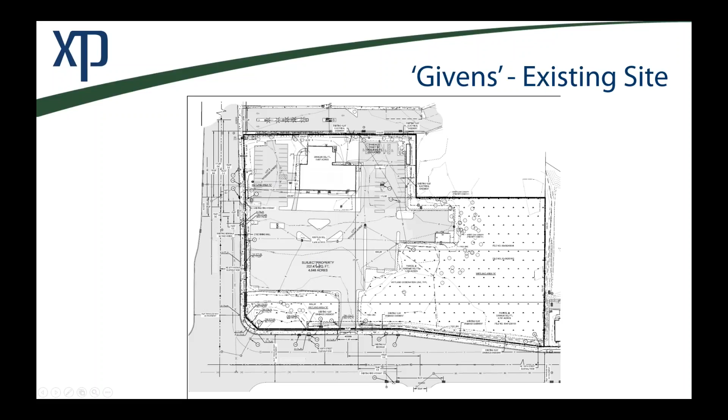I always like to show the givens, right? People, if you're kind of new from college, you're always kind of handed the givens to start a project. Well, this would be the given in this case. So we have the existing site, and that's kind of the starting point. The store is going to go in the southern portion of the site. There's already a store in the northern zone. That's going to stay there. So it's the southern portion where we want to build a new store. And that's it. This is the info we start with.

And we need to, specifically on the stormwater side, create this. All right, this is where the store is going to go. Here is the parking and the sewer and all the elevations, all the detail to build it. Well, the detail to build it and, of course, to review that that makes sense. That's what the city will do.

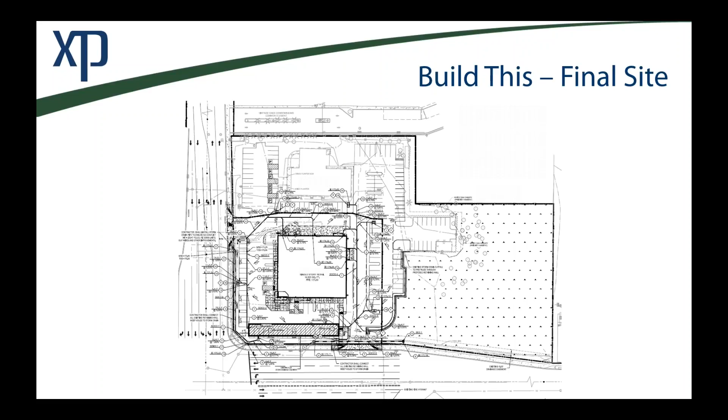So for this project, we looked at design constraints. Well, the first is there's a first flush requirement. Okay, so we need to hold on to, retain, and infiltrate the water quality event on site. In this case, first inch of rainfall runoff. So we have the first flush we need to hold on to, and then there's no increase in the flow for the 2 through 100 year rainfall events. That's pretty common. In this case, we aren't looking at volume, it's just peak flow.

A lot of cases, a volume also can't be increased, right? So the existing site, what's the peak flow and what's the peak runoff volume? Many cases you need to mitigate your developed condition flows and the volumes to not exceed the existing.

So looking at a development project, beyond just stormwater items, there's a large minimum parking requirement, as you would expect. A store's going to have lots of customers, so that means a lot of paved area. So the site's going to be highly impervious. And something else, high traffic or heavy truck driving routes. So there's an idea, we'll talk about pervious pavement. Whether or not this is really a concern in this area, it was thought that loading zones and areas where a heavy truck will turn its wheels a lot might really erode a pervious solution. Okay, so that needs to be taken into account.

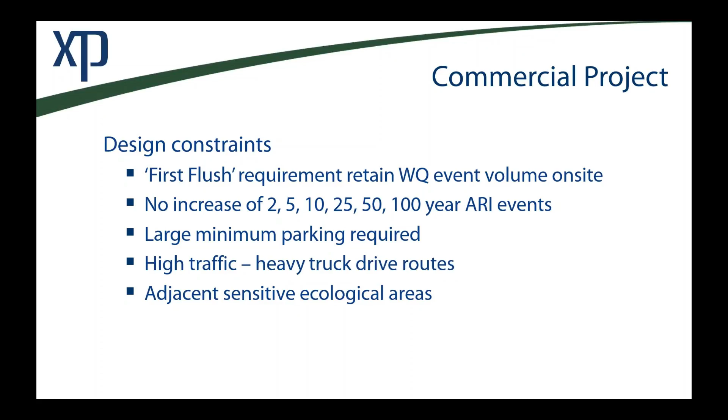All right, so considerations on the site. We'll look at this more in a second, but if you can remember from the pictures, there's really no room for a single conventional detention basin, right? We would have to have too little parking, or it wouldn't work on our site. So we have to get more creative. There's multiple drainage paths. We'll see how the roof drains, the different parking zones. Those all kind of create problems for us when they come together.

Ultimately, there's an existing storm system that we're going to connect into, right? That's pretty common. So that's, of course, a constraint, a consideration. We need to make sure we can match into that system. And for the pervious solution, there was maybe a thought of, well, what if this was clogged? Okay, so we could look at kind of a clogged scenario of the permeable pavement.

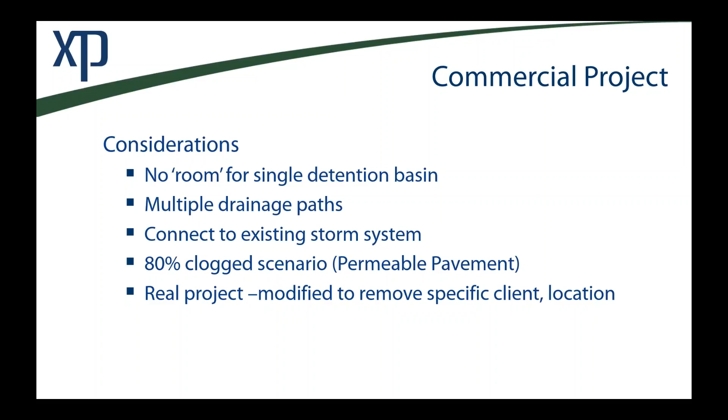And just to reiterate, this is a real project that actually incorporated the final design that I'll show. Though I have removed the street names, removed some stuff to make it more generic. And also, I am showing all the design considerations, right? Often you might only show on plans the final one. Well, here I'll be using XPDRAINAGE as the tool. We can look at these all side by side, so you can see the thought process across this project.

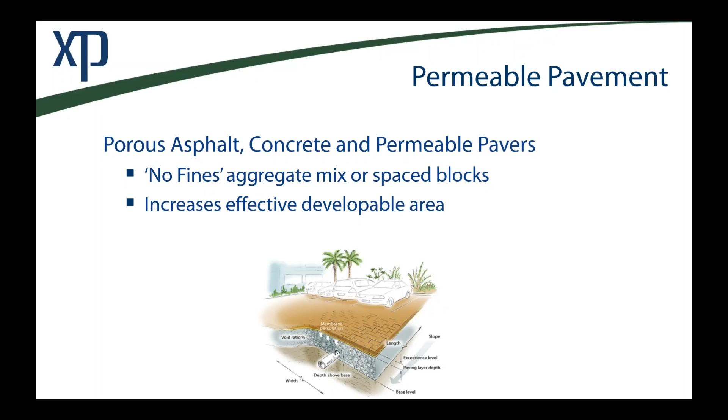For a bit of background on the different options, permeable pavement. That's porous asphalt, concrete, or pavers. Basically, that's a no fines aggregate mix or spaced blocks. Think of it like that. So because we're able to have water immediately get down through this, as you can see in that cross section below, we can increase the effective developable area quite greatly. So whereas we might have to have a pond or a swale or some series of pipes, we can just have this porous area that you can park on top of. So it's pretty fantastic for that.

And it's also a really great tool to infiltrate that runoff volume, that initial first flush volume. And in doing so, we're going to really be able to reduce the amount of pollutants that are going to be on our site. A big one is temperature. I'm physically in Portland, Oregon, so cold water fisheries.

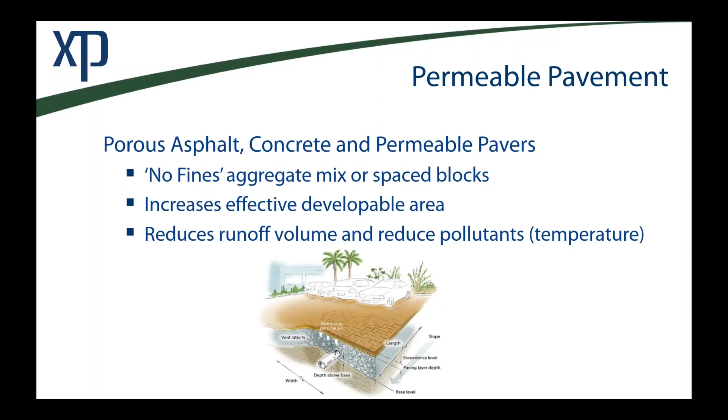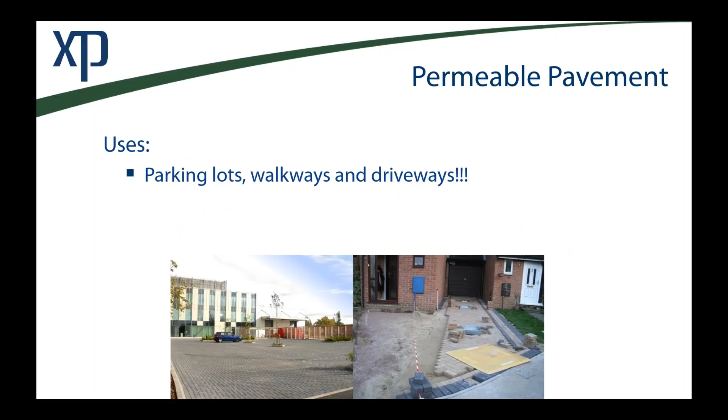We want to knock down the temperature of the stormwater running off our site as much as possible before it runs into the streams. Okay. Uses might be straightforward. If you're not familiar with this, it looks like fewer people have used this option. Pervious pavement can be used pretty much everywhere: parking lots, walkways, and driveways. That's how it's used on this project.

So there's a lot of discussion about how fantastic this is for main arterials and highways, right? It has really the same life cycle that a normal asphalt roadway would have, but it's a great reducer of spray and increases visibility. So one thing to watch out for is perhaps freeze-thaw cycles, but lots of discussion about how that isn't really a disturbance as much as sediment loads in these systems.

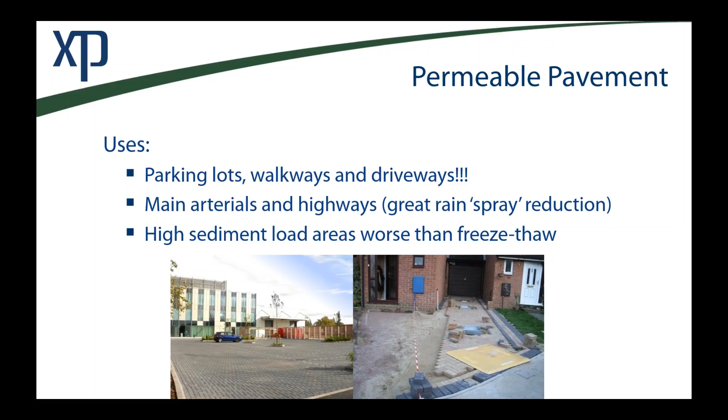So considerations for permeable pavement. We really need to consider a few things, which are, practically speaking, in most cases very hard to do, really cumbersome. But that's one thing that XPDRAINAGE does really well. So we actually need to assess the hydraulic behavior through this facility. Among those items, what about site slopes? We need to look at how the flow actually goes through the filter zones, how it will move down along that pervious area, and what if the site has some sort of slope along the parking area?

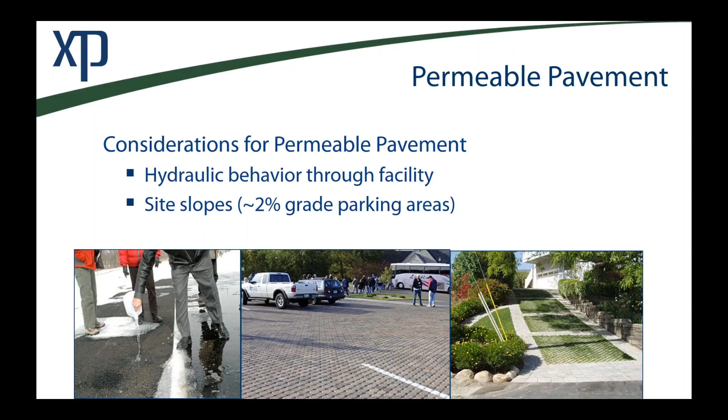You could have a perfectly flat parking zone, because the infiltration will occur directly in the parking area with the permeable pavement, but you might have to tie in. You might need to meet a couple areas that are at different elevations. So whether you want to or not, you might have to put it at a slope. Well, you might have water bubble up out of one end. So we'll look at how slope along these facilities is often overlooked, and see how big an impact that could make. As I mentioned, the true layering of structural fill.

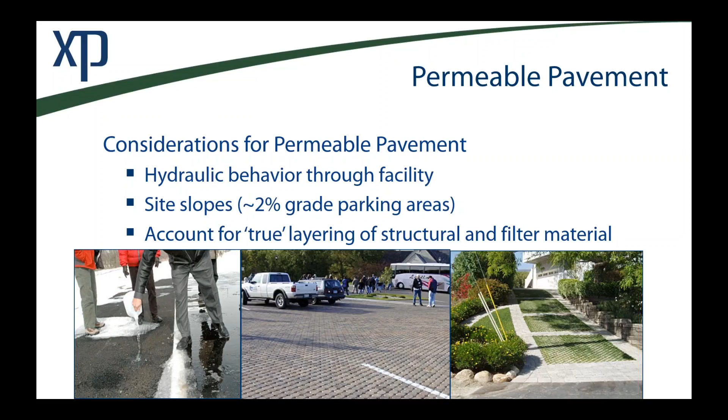Another item in the general hydraulic behavior is there's likely many different outlets to a parking area like this. You're probably going to have underdrains, maybe not. If it floods in a high flow event, you're going to have curb cuts, so you're going to have weirs all around that parking area. To represent all of that in Excel, which I had done in the past, or some basic tool, is really hard. So we'll see how easy this is to incorporate and check out, even in just a few minutes in XPDRAINAGE.

The other item is a storage tank underground. This could be an above ground rainwater tank, but we're looking at below ground collection tanks. These systems vary greatly. They're manufactured in different media by different groups: corrugated, plastic, steel, precast concrete, milk crates, as I'd call it. So that's the general concept. As you can imagine, there's so many different things you could do. Having flexibility in how you can assess that is really important.

The main idea of why this is so advantageous, and it looks like over a third of the people tuning in have used this before, is that this lets you basically have that detention pond idea, but underneath parking. So right away, a really big win. It might be the make or break aspect of a site. You might need to have 30 extra parking spaces, and that lets you have a certain store, or add in an add-on commercial retail spot on your site.

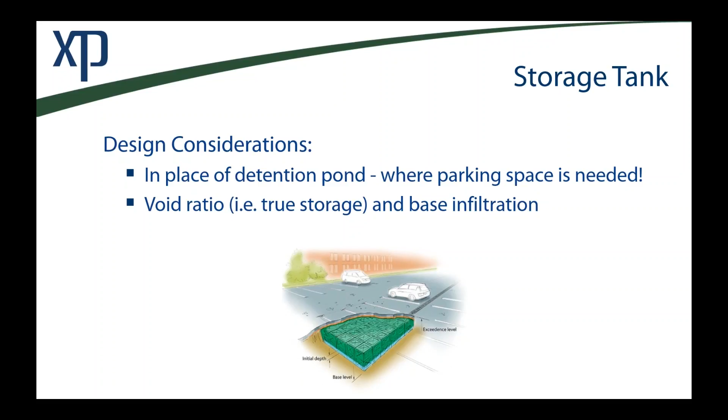So big ones to look at: void ratio, what's the true storage, and all the types of infiltration you can get around this. You probably have some sort of base infiltration under your facility, and infiltration on the sides of the facility. Being able to assess all of those pieces is something we're going to do in XPDRAINAGE, and see how this ties into the whole drainage system, not just using a spreadsheet or one tool to look at just the basin, but seeing how it incorporates itself into the rest of the system and its impacts is really important.

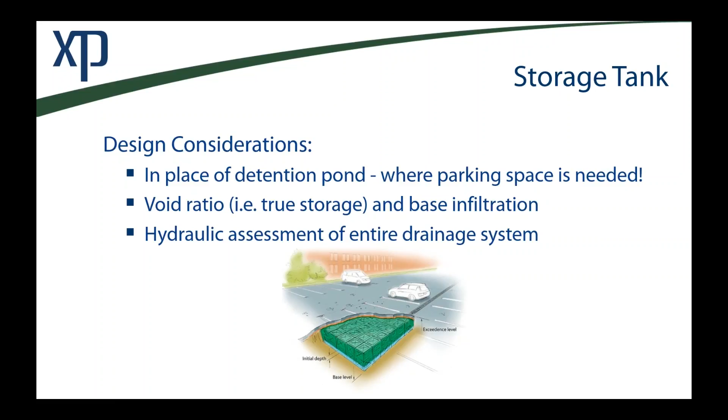So let's just jump right into this project that I can show. So here it is.

So here's a real project, and there's lots of details here. Just for the sake of time, I'm going to be kind of high level with how I look at this. So here's the project site. If anyone's not familiar with XPDRAINAGE, it's probably a pretty intuitive interface if you've ever used a Windows computer or some sort of CAD or GIS software. If you use the ribbon, I loaded in background data. Basically, I walked left to right across this ribbon to finish the project: load in background data, build up the system, analyze and look at the results.

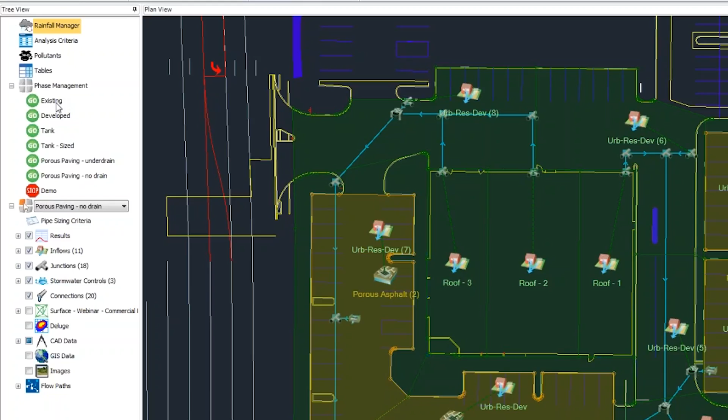Okay, so what we're looking at right now is one of the kind of finished ideas. That's on this tree view on the left. There's this phase manager. This is really looking at all the ideas side by side. That's kind of the point of design. We don't know the answer before we start. So I have an existing site, different tank options, different porous paving options. I'll just jump right to how I started this project. So here, this is blank, and I'll show kind of how this began. That's a useful way sometimes to get your mind around how we moved into those later stages.

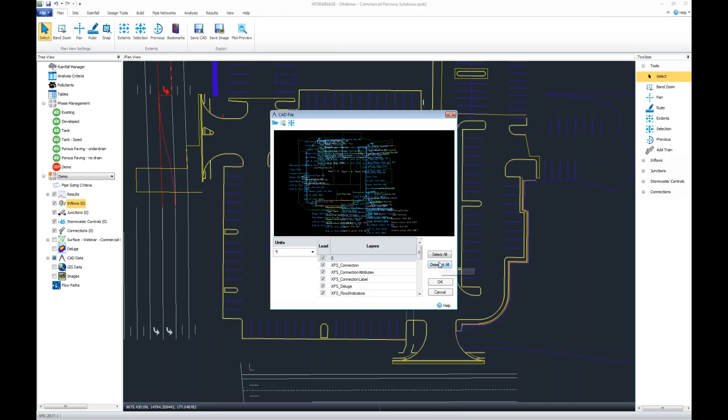So the first thing might be, here's my site. You can see here's the box store in the middle. Parking really has to go all around it. That heavy loading drive aisle, you can see here, is where there's no parking, right? So this needs to not really have any porous solutions. So let's kind of start a project. There was some work already done in CAD, so great, we can use as much as there is. So I could start with some catchments which were already placed as a starting point. So these are in CAD, and that's only the area, right?

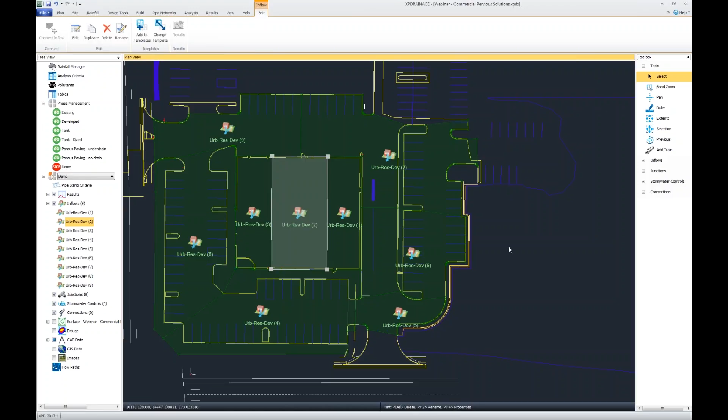Well, I could use a template. It's a really great option. So say, hey, this is my developed land use. Great, import those items. And we'll see, sure enough, I've imported the catchments for this site. Based on that template that I used, here's all of the hydrology input for that land use type. Well, what we'll find is maybe I want to change that. So I could individually make those changes. I could also use this tables option.

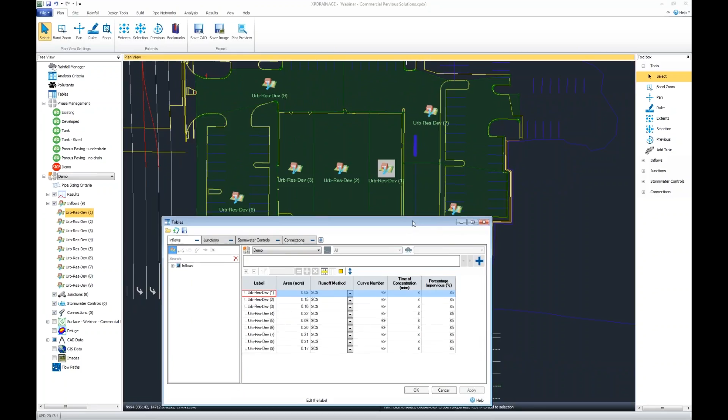And we'll see here that I have, you can see the site, and I can click through these items to see, well, there's some roof areas, right? And this site's pretty small, so I might change the default of 8 minutes to 5 minutes for the time of concentration for all of the site, because the catchments are so small, right? It's kind of the minimum you'd use. So great, I've changed all of the TCs to be 5 minutes.

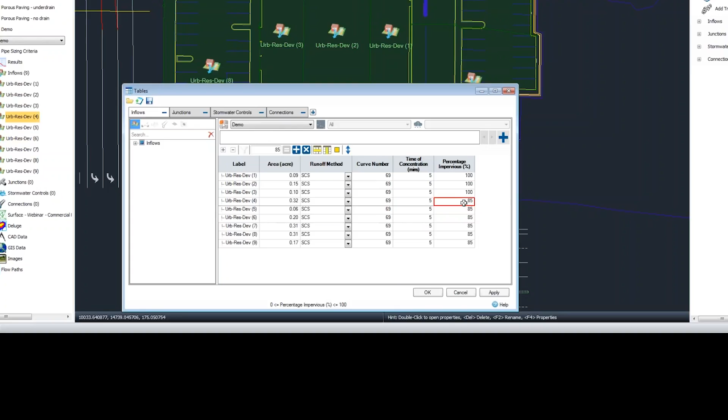And looking at the site, there's the roof area for the building. We'll see there's going to be downspouts that tie in. Well, that's probably 100% imperviousness. This curve number is the pervious curve number, right? So if I have 85% imperviousness, 15% of it will use this number. But you can see in the schematic these first 3 catchments are all roof areas. They're all 100% impervious. And there may be some very detailed work to go and find exactly the weighted values for imperviousness on the site. I might say that they're all about 92%, just for example's sake right now.

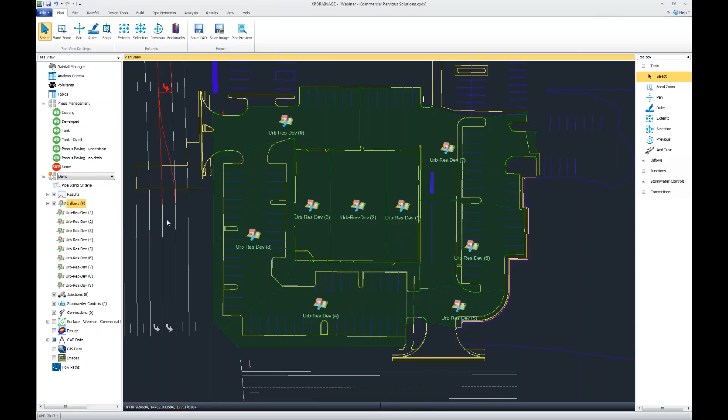And we'll see that if I was to edit one of these items, these values have changed. All right, so a 5-minute TC and 100% impervious for one of the roof areas. Right, so the hydrology is pretty straightforward. And also, as a starting point, there was a very preliminary drainage layout done in Civil 3D. So I can import that pipe network. So I'll say import, and we'll see that right away I have these downspouts from the roof areas, and how this all connects together.

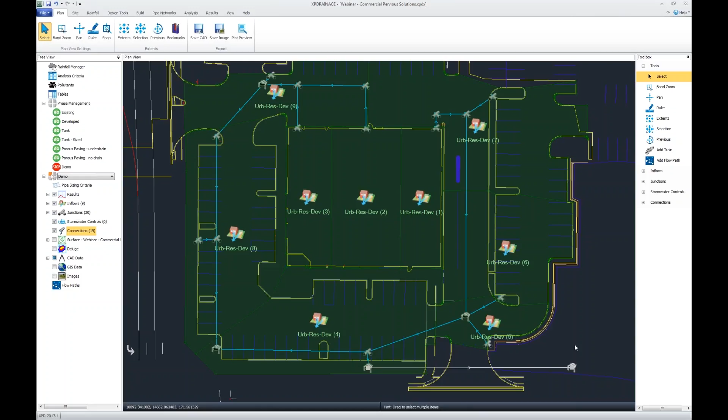Ultimately, on this site, you see this lower manhole and this piece of pipe. This is the existing system we're tying into. Okay, so we have that represented. We could have delineated that or laid that out in XPDRAINAGE, but we had some data. So let's start with that. And from here, we want to craft our solution. Clearly, if there's no mitigation, we're going to be increasing the flow, right? We're going to be paving a lot more of the site. So we need to place some sort of facility.

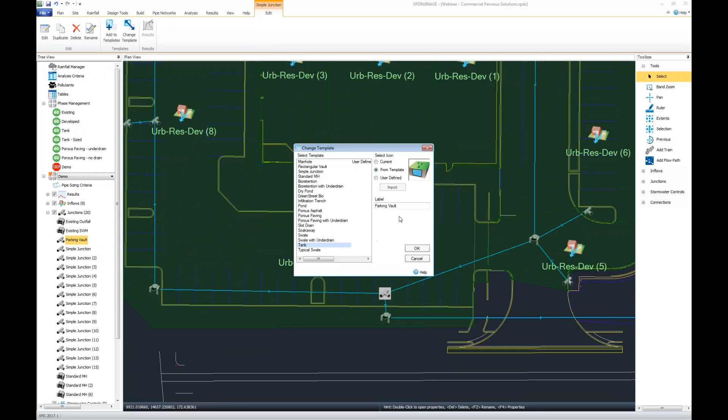So I could start by this lower culmination of all this flow. I could change this. I'd say change template. And I can make this be a tank. I want that underground tank. You see it changes the icon. And I could change that outline. So, just for example's sake, I'm just going to put something in here. Great, so here's that outline. I could twist and turn that. I could move this around.

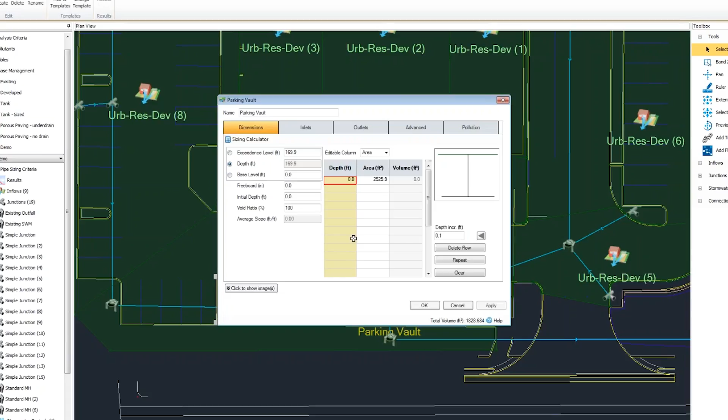And one of the great things about XPDRAINAGE is that I'm very quickly laying out. We can see what this looks like. I'll say, all right, this is 4 feet deep. And since it's going to be the same information, great. Just vertical walls. Here is my area.

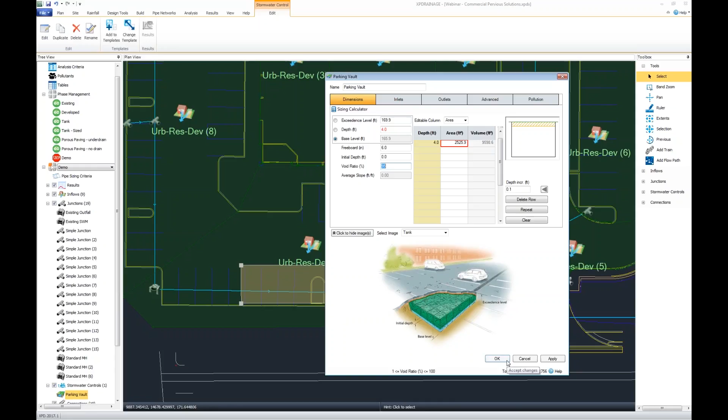So I can very quickly show the schematic and set out what this is. So if I say, hey, there's a 6-inch freeboard and we have about 95% of void space, that might be a little high. Any work you do, we could save and use as a template from here on out. So if I want to add more storage facilities and use that in the future, great. So it's very quick to lay out the detailed system just by modifying that existing pipe network.

So one thing we could do, great, here's this detailed system, very real to how it's going to be. We can also respecify some of the inlet locations. This is the inflow point into this facility. And this is really quite valuable because it's going to let us have these pipe lengths and the pipe inverts and slopes all be very realistic. Okay, we're not using some sort of schematic system. Maybe the inlet for this parking area all drains down to here.

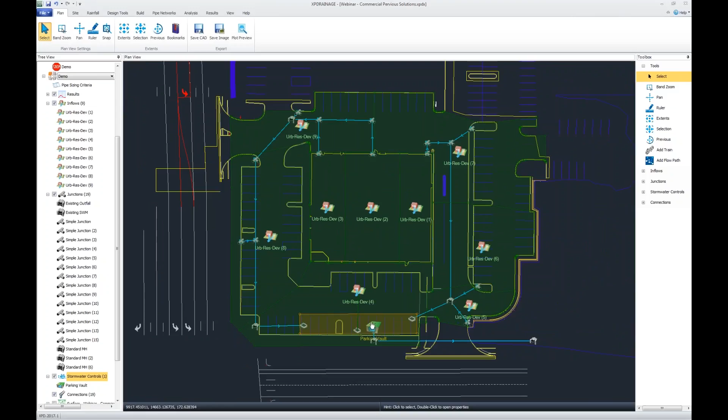All right, so getting away from that node and link idea where maybe just this point would be the node and the pipes connect. Well, the pipes are going to be too long. They're not going to have the right slope. We're going to lay this out exactly how it's going to be built. That's really the point of XPDRAINAGE. So right away, I've just made my first guess. I have all the system that's going to drain into this facility. I happen to have that as one of these other phases.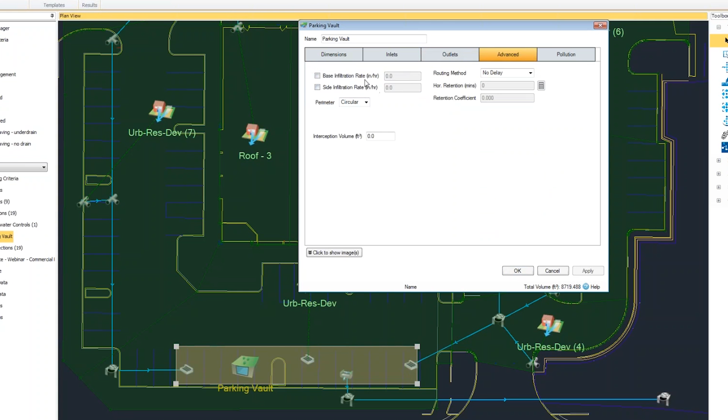We could get as detailed as we wanted to get. If there was good capacity to infiltrate under our facility, we could add in base infiltration, side infiltration rate, so on and so forth. So very quickly we laid out this system, and here's my first guess at the tank size. There's a phase that's called size. Well, you can imagine that's one that I've upsized a bit. This is actually the final tank that's used, but we'll look at that last, okay? So here's my first guess.

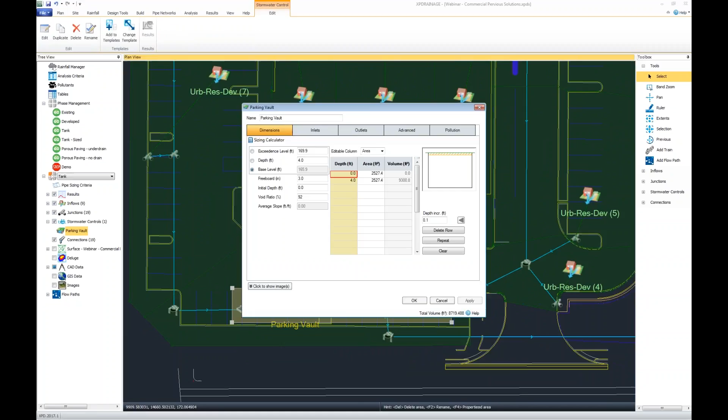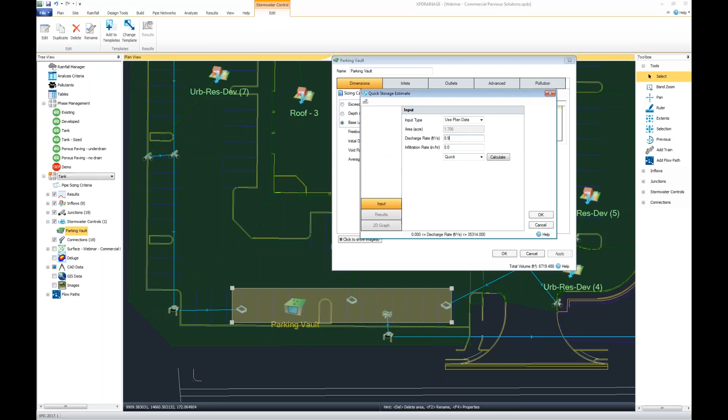I could just run the software, right? Guess and check, see how big this needs to be. I could also use some sizing tools as maybe a better starting point. So I could go to a quick storage estimate, and you'll see here the software automatically looks at all of the connected inflow areas. It's about 1.7 acres. And let's say I know my existing 100-year discharge rate is pretty low, just under 1 cubic foot per second. Calculate, and this is going to give me a range for a good starting point for this facility. So you can apply that, great. That'll increase the size of our facility.

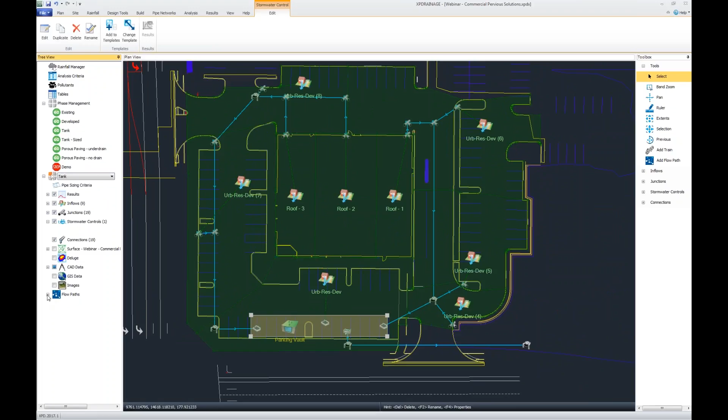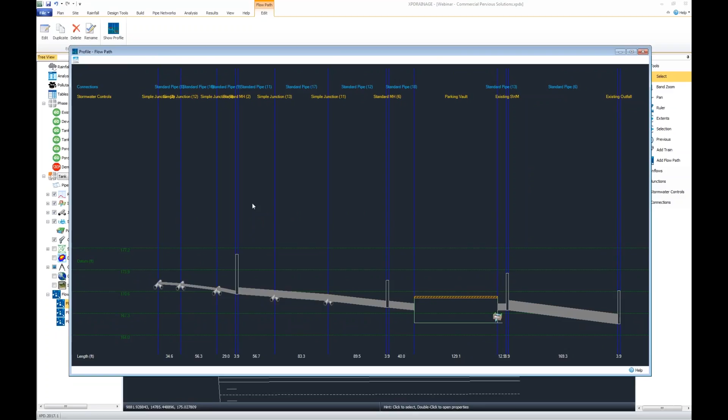I just want to jump over into the Pervious option. Oh, actually I could show this right here. So here you get an idea of what we're looking at on our site. I'll just show this profile. And this is so important, right? Understanding what's happening, beyond just a spreadsheet, beyond just simple tools, seeing it all in the plan view and how it all connects together, and then really seeing this profile, making sure these all daylight out together, making adjustments as necessary, really important to make these tweaks. Okay, so here's our facility. So that's what our storage tank option looks like.

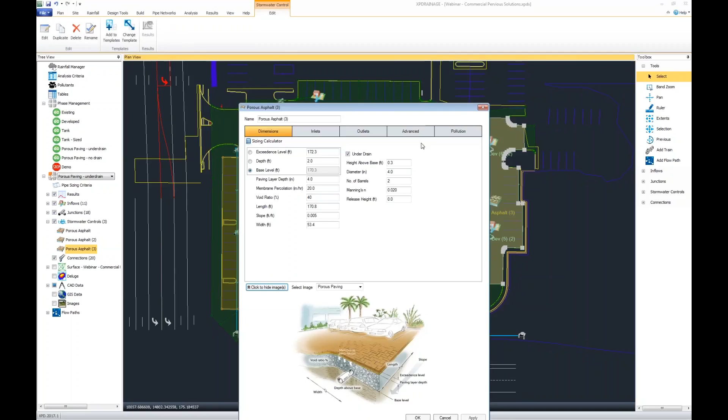And now I can go over to one of the under drain options. So there's two options I have here. One has an under drain and one doesn't. So I can look at one of these facilities. You see one, I might say, here's an under drain. What we found out, if you have an under drain, the water very quickly leaves these systems. So it's not ideal for larger attenuation, right? We want to have all the void space fill up in this facility. So using no drains allowed more attenuation on our site.

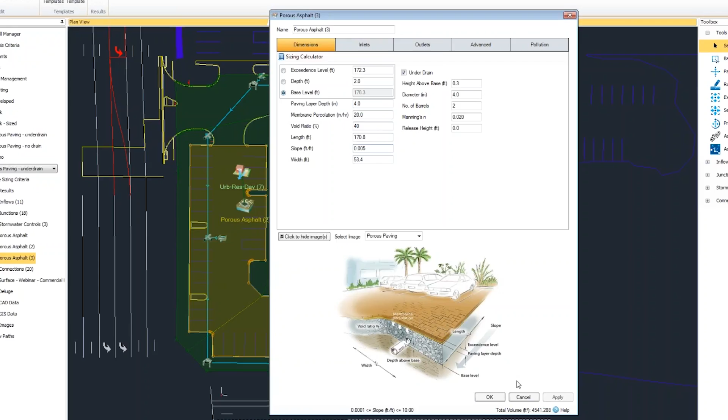A lot of options you have for the paving depth. Is there some sort of membrane? Is there some sort of filter restriction between the paving and the underlayer? Okay. And a big one's the slope. We're going to see that likely in the real world, you're going to have some sort of slope across your parking area, and how that affects this system.

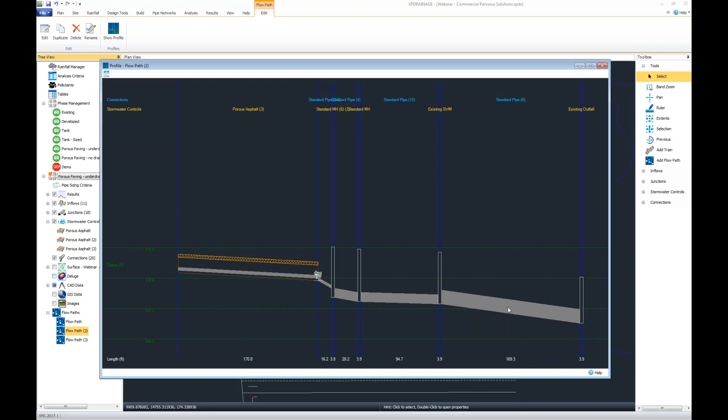So I could show one of these. We'll see this long section. We can see here is our porous parking area with this under drain pipe. So that water, as soon as it gets through this, it's going to pretty readily get into the storm system. You can imagine it's not going to do a lot to knock down the peak flow from our site.

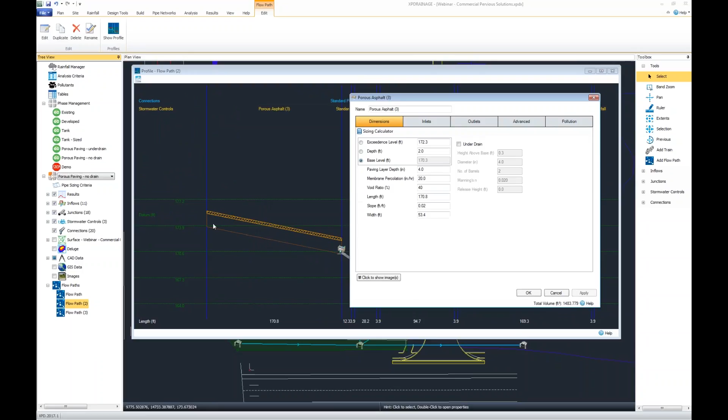So another option was to have no drains. We can look at that same flow path, right, with no drains. And in fact, I think this one, the slope on the site is actually more accurate here. It's about 2% for this facility. I can edit right through this long section. So about 2% is actually what the slope would be. The other one was a little too flat.

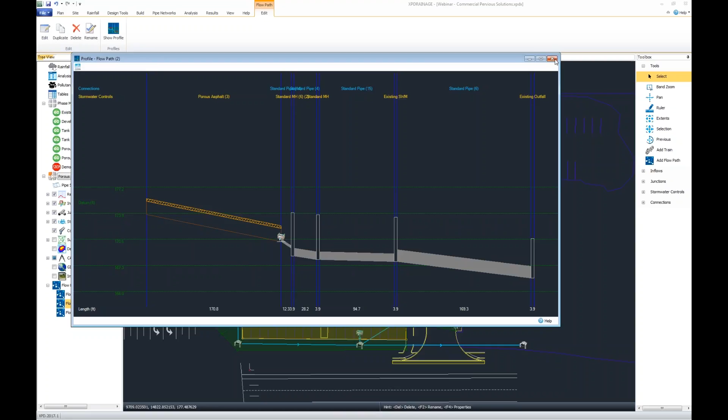So to meet up with these existing sections, you'll see it gives us quite a bit of fall across the site. Once this fills up, you can imagine we're going to have some overflow here, which kind of isn't what we want. So I'll just run the assessment. It'll just take a second.

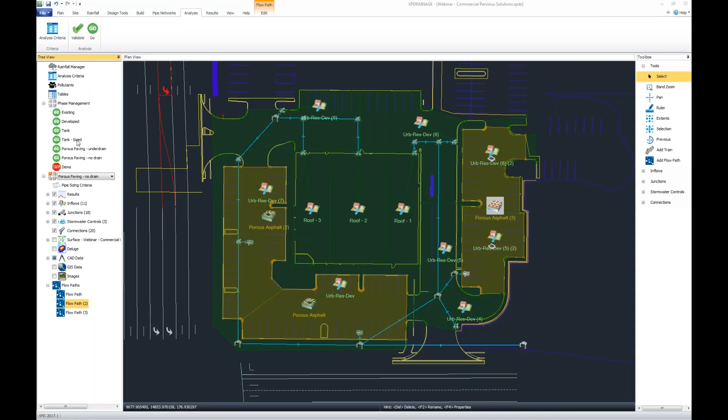So I'm running all, how many, 6, 7 different phases, different ideas, right? So the existing site without anything and the existing land uses and all the different design ideas kind of side by side. As we'll see, of course, I'll show the upsize tank idea, how we ran the initial guess using that volume size. It wasn't quite enough, so we just kind of bumped that size up and that was our solution. Okay.

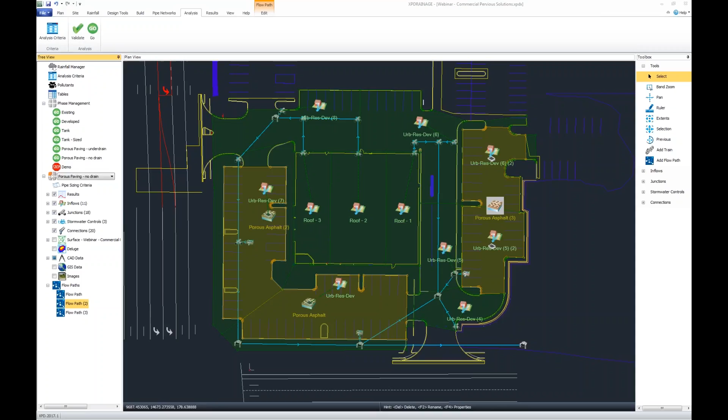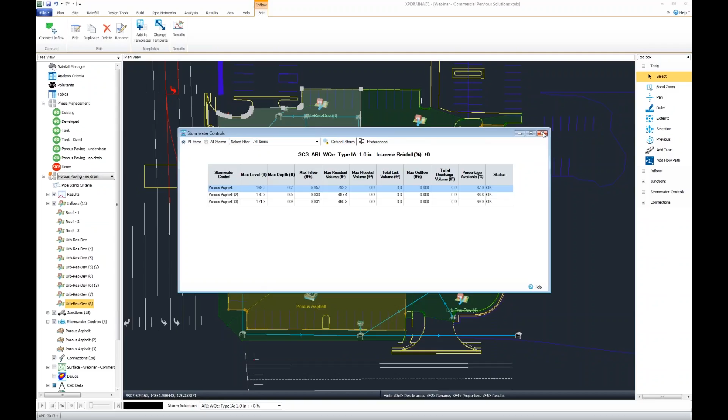So a couple things that we'll find is that, well, we're hoping to over-mitigate the large events by holding on to the flow in these pervious areas. Clearly the roof areas aren't being treated. So what we'll find is how the flows off the roof, and actually the flow in this upper catchment, is really still too great. So let's look at that right now.

So first thing I can do is to just go back to a profile. So this again is the no under drain phase. Let's look at one of these systems. So I'm looking at our range of rainfall events, water quality events, 5-year and 100-year at the moment. So I can go to the 5-year event, and you're going to see we're already overtopping this facility.

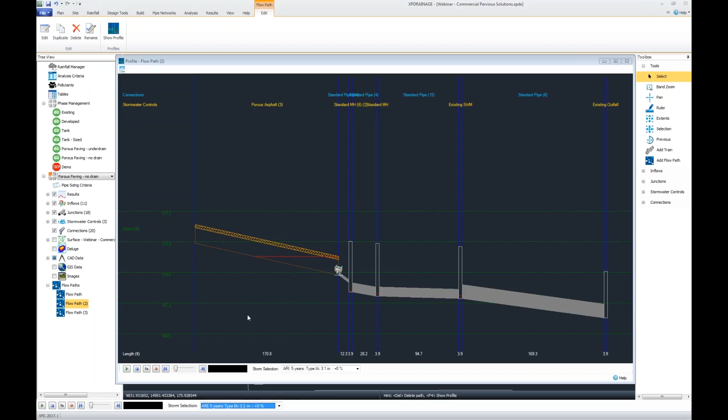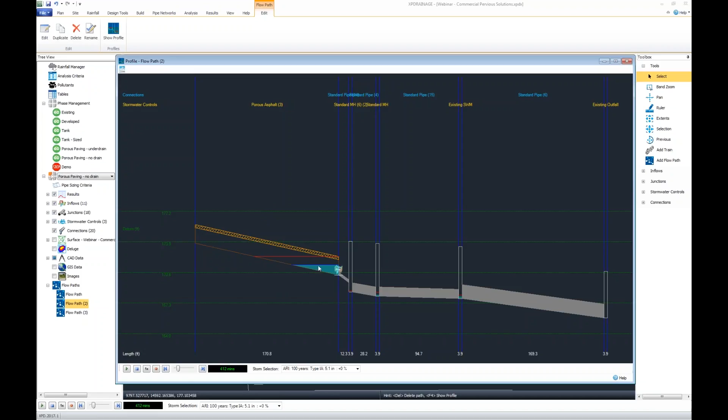All right, so we're representing how this works. We're representing the outlets on this side. But as this fills up, you see that indicator shows that we're spilling over the edge of this facility. Okay, that's really a problem for us. Maybe we thought that we could get all the storage in this whole parking zone, but really we can't because it's on a slope. So let's look at that in a little more detail.

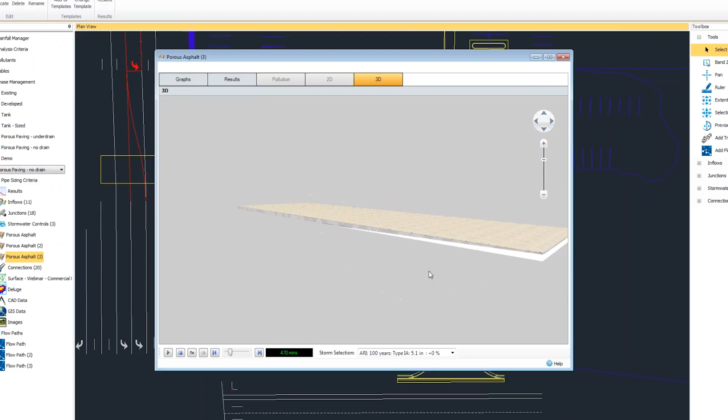All right, we could look at the results. Obviously, we could look at the graphs and the trends. I really want to see this 3D view. This is kind of a simplified version, right? We're just going to show this basic rectangle. And we can see how the water really fills up and overflows the toe of this site.

It doesn't look like a lot, but realize this is freely flowing over this edge. So that is going to have flow over this part of the parking area and probably right down here out of our site. Okay, that's not what we want, right? So here's another way to see how that would work. See, only a portion of this is filling up.

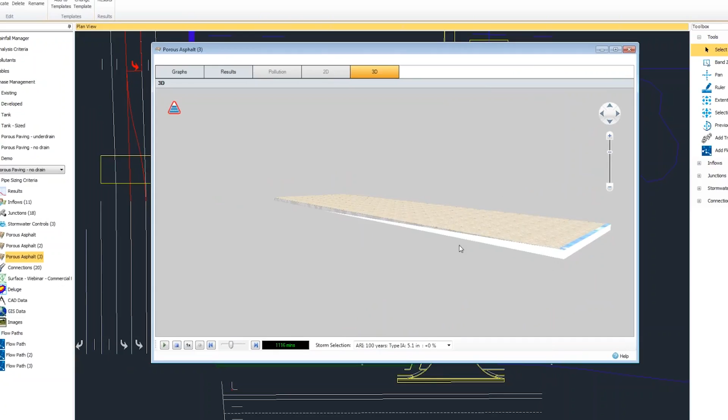And we can look at, let's go to this phases report option. Let's look at a summary of the existing compared to the different porous paving options. So right now, I'm just looking at the 5 and 100-year events for simplicity. You'll see that the existing outflow is about 0.3 cubic feet per second. We itemize each outlet and a total, so there's a duplicate here, so there's 2 of the same.

So you see the under drain much higher, right? We aren't really attenuating flow. We're almost up to 1 CFS. No drain, wow, we're still discharging a lot of flow.

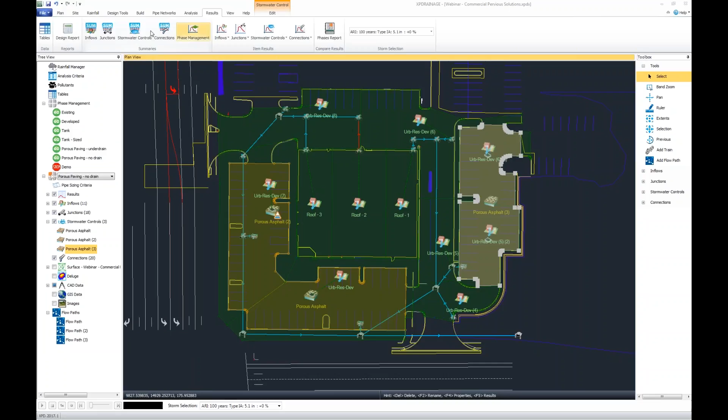So I could look at the individual stormwater controls and I could see the 3 different porous asphalt areas. For the 100-year event, there's almost no outflow. So we're almost totally containing all that volume. But the problem is those roof areas and this parking area up here is still contributing a lot of flow. So that is kind of busting our existing conditions, even though we're way over attenuating the rest.

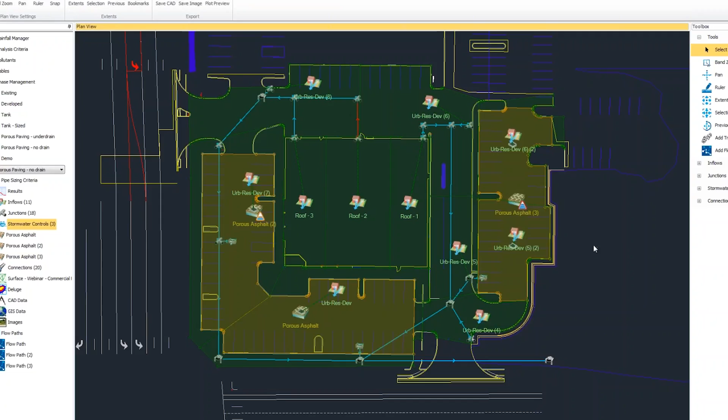So that was kind of the idea, maybe with just these 3 zones, without putting porous paving on the trucking route, we could over attenuate and meet the needs. Looks like we can't, right? Something else we're seeing here, in red, we're seeing that this pipe is undersized. Right, if I look at the results for our connections, we'll see in red pretty clearly, surcharged.

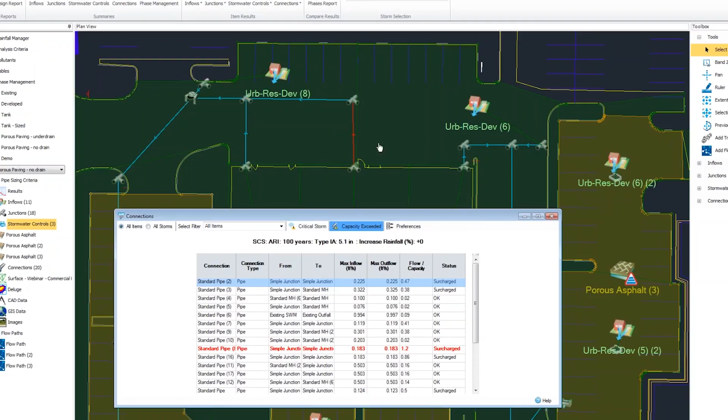I don't want to upsize that pipe. So I left a few undersized pipes and a few problems in here just for the sake of the presentation. It's kind of fun to spot those as opposed to seeing a perfectly clean, done model. So I'd jump in there and I could upsize. This pipe looks like it's a 4-inch pipe with this downstream connection being 6-inch. So it's a little roof lateral. Maybe we'd increase this all to be 6-inch pipes through here.

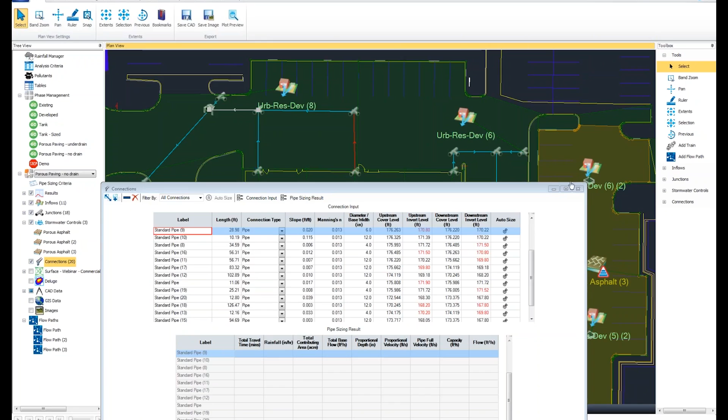Okay, great. So porous paving, just not going to work. We can't over attenuate enough without treating those roof areas. So the option is, well, let's perhaps look at some of the tank options. So I'll change what I'm representing here. And we'll see again, about 0.3 is the flow for the 5-year event. Both of the tanks, our initial guess, does a good enough job. It knocks the peak flow down.

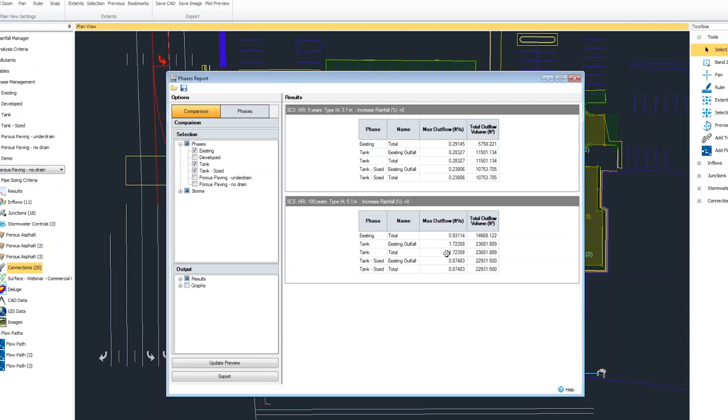Again, the volume, we don't need to design to here. You might, though. A lot of areas do that. So you can see that, well, we have to figure something else out because the volume's great, pretty great. But our 5-year storm's okay. It's the 100-year event that, well, clearly we fill our tank up all the way. I can show a profile of that.

Let's look at this system here. And we'll see how the tank in the 5-year event, it just engages this midway orifice. At the top in this structure, there's a high flow weir. So we're really doing a good job of attenuating the flow in the more minor events, though the 100-year event, we're going right to the top and we engage that bypass weir, okay, and we're letting too much flow out. So what do we do?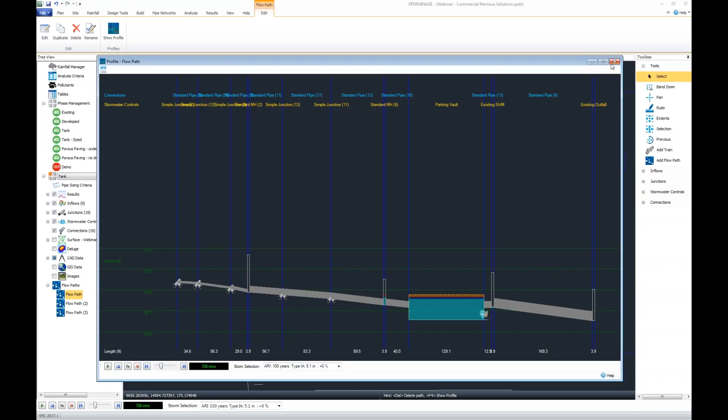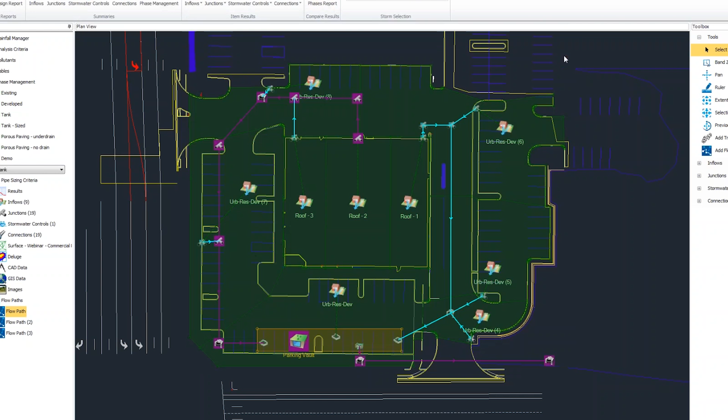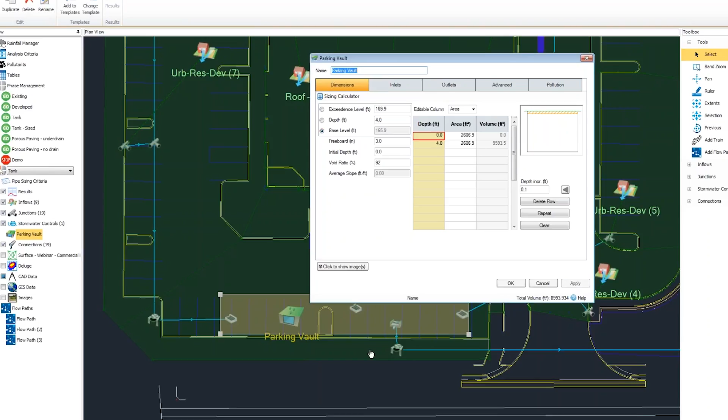Well, what we did was, let me go back to that comparison one more time. We were able to adequately knock down this flow by just increasing the size of our facility. So we'll see here's this existing site, and what I did was I just went in and saw, we are looking at the volume, looking at what we need to attain. I just went to the sizing calculator, and I can scale this up by another 10%. So that adjusts the size, and we're just going to bump this tank another 10%, and that's going to do the trick. And that's really what was done.

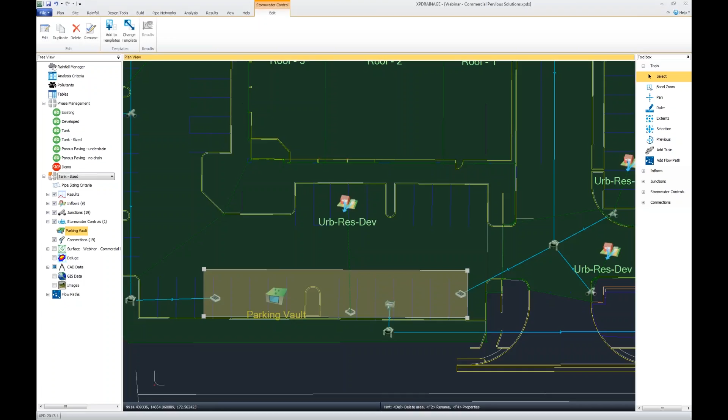You see it, only 10%. It wasn't a huge change, but that was enough to give us this final layout, which was adequate to knock down those peak flows. Again, having this multi-stage outlet structure, all these pieces together is what got us to this being the final design.

And actually that's the scope of what I wanted to cover with this very real design and the different ideas and thoughts which were laid out and looked at in just a really short period of time with XP Drainage, which otherwise would have been a really hard exercise, especially the pervious part. So that's really what I wanted to show.